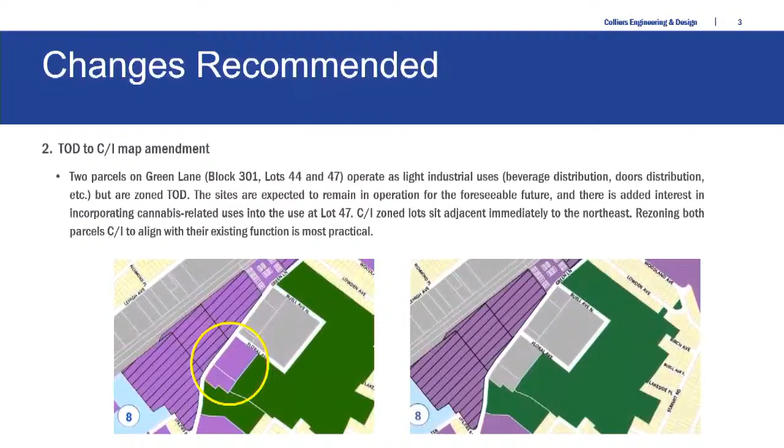In addition to changes recommended in the master plan reexamination, we had several administrative changes that I presented to you. I'll go over the gist of them now. These are miscellaneous amendments requested by the township, including regulation of massage and bodywork services, tattoo parlors, prohibiting methadone clinics, and parking of flatbed utility trailers.

Specifically, tattoo parlors, we defined them matching the definition that the state provides. Technically they are body art establishments, although colloquially we call them tattoo parlors. This would confine them, as a conditional use, to properties along Route 22.

Methadone clinics, again it's a state definition, and that is one use we are allowed to prohibit, and we've done so. Massage and bodywork is actually regulated elsewhere in the code through licensing and inspection regulations. However, we've cross-referenced that health and safety section of code within zoning so that they are consistent with each other and the two are understood to speak to one another.

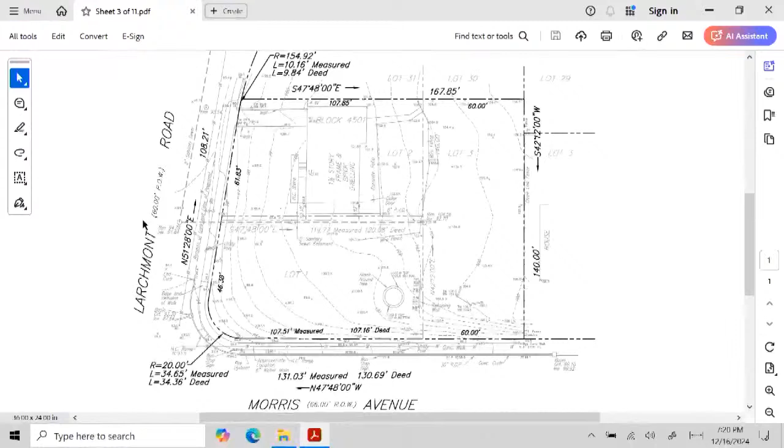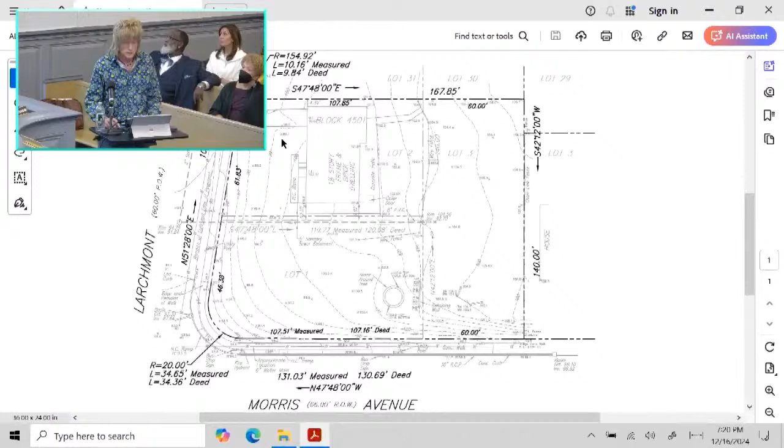The site is located in the NC Neighborhood Core Zone District. Uses surrounding the site are single-family detached properties to the north and to the east, offices and a church to the north and west. To the south and east is a bank and offices, and to the south and west is a funeral home and offices. So this is the site plan sheet 4.

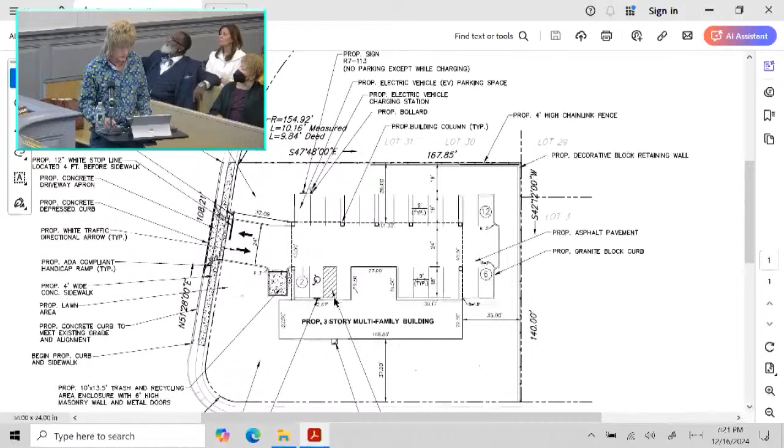So the applicant for the project is proposing to demolish the existing house and construct a 3-story multifamily dwelling and an asphalt paved parking lot to serve the development. There's a total of 11 apartment units proposed. The first floor will contain 3 one-bedroom units. The second floor will contain 4 two-bedroom units, and the third floor will contain 4 two-bedroom units.

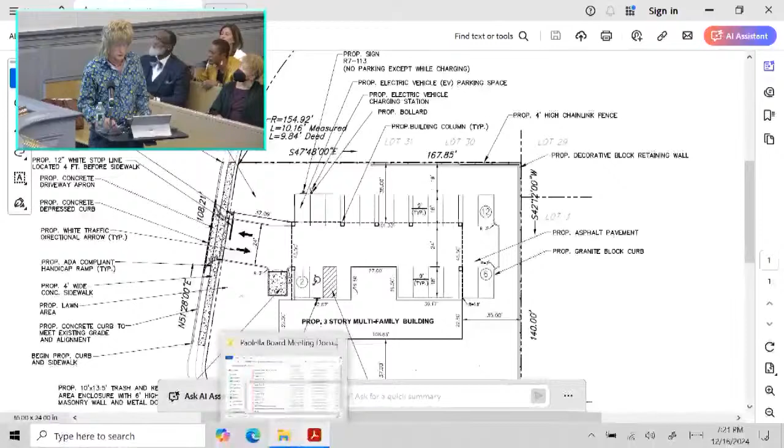The approximate dimensions of the building are 68 feet by 109 feet. The building will be set back 37 feet from Larchmont Road, 37 feet from Morris Avenue, 35 feet from the side property line, and the rear property line will be set back 35 feet as well.

There's 20 parking spaces proposed, including one handicap parking space and one electrical vehicle parking space. The dimensions of the stalls are 9 by 18 feet, and the handicap space will be 8 by 18 feet with an 8-foot wide aisle for van accessibility. The parking lot will be partially covered by the second floor of the building.

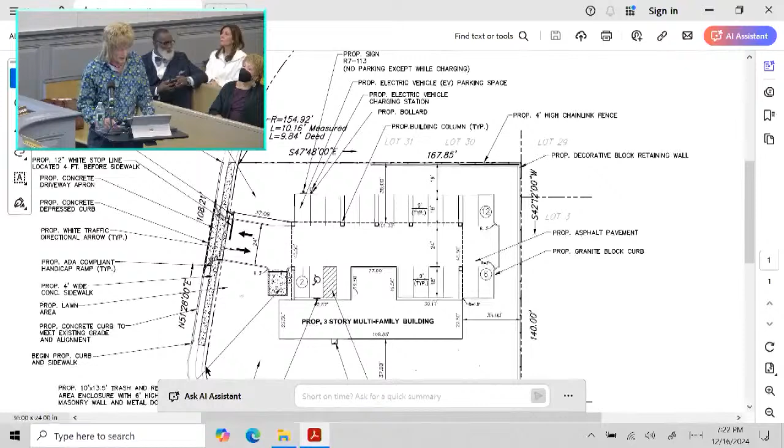Access to the site will be from Larchmont Road by way of a 24-foot wide access driveway. That'll be two-directional. There will be minimal truck traffic anticipated. The aisle widths should be sufficient, and the traffic impacts should be minimal at the driveway.

So we'll go to the grading and drainage plan, which is sheet 5.

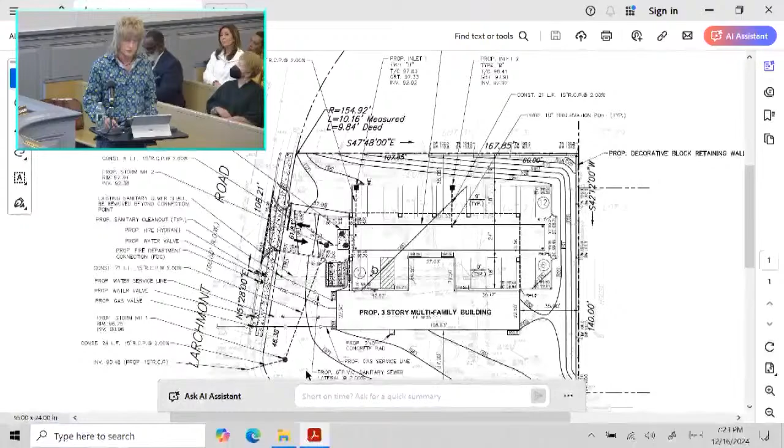Proposed drainage improvements for the project include construction of a subsurface detention facility located underneath the parking lot, and a storm sewer system to collect surface runoff from the roof and the parking lot. All that runoff will be directed to the detention facility. The proposed detention facility will have a storage capacity of 4,976 cubic feet. It'll consist of 15 feet by 114 feet by 3-foot deep Brentwood storm tank modules.

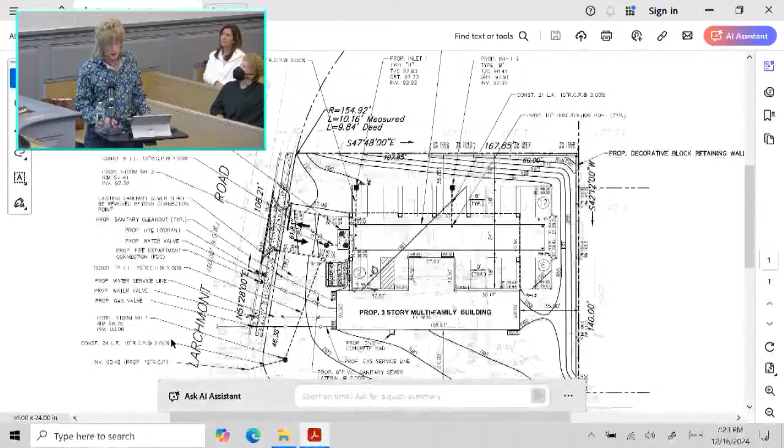The outflow structure will control the runoff from the site. The outflow pipe will be connected to an existing storm sewer on Larchmont Road. Since all the runoff will be directed to the detention facility, there will be no impact on downstream areas. As far as utilities go, proposed utilities include existing gas, water, electric, and sanitary sewer, which will be extended from Larchmont Road into the site.

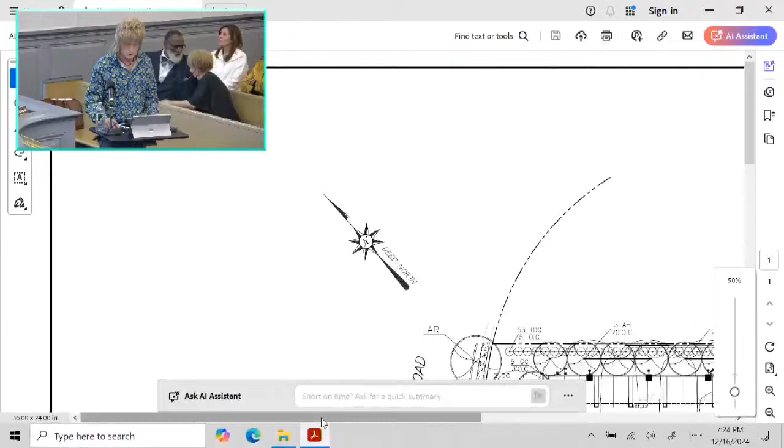As far as lighting and landscaping, we'll go to sheet 6. Lighting will consist of 10-foot high pole-mounted luminaires. There'll be LED lights located along the perimeter of the parking lot. There'll be down lights so they won't shine onto adjacent properties or the existing roadway system. Canopy lights will also be proposed under the garage.

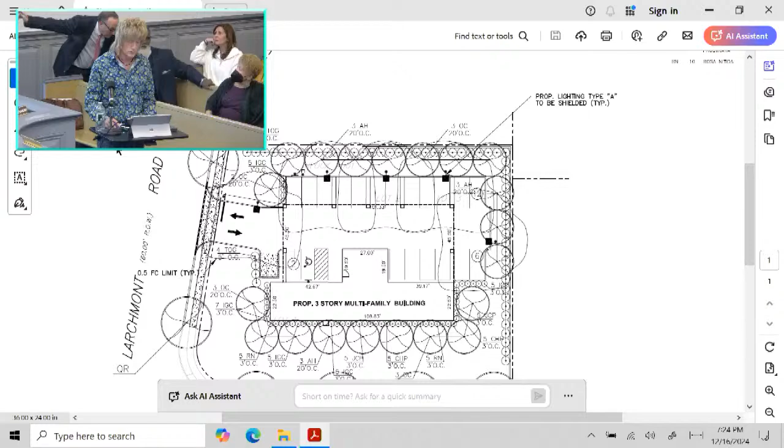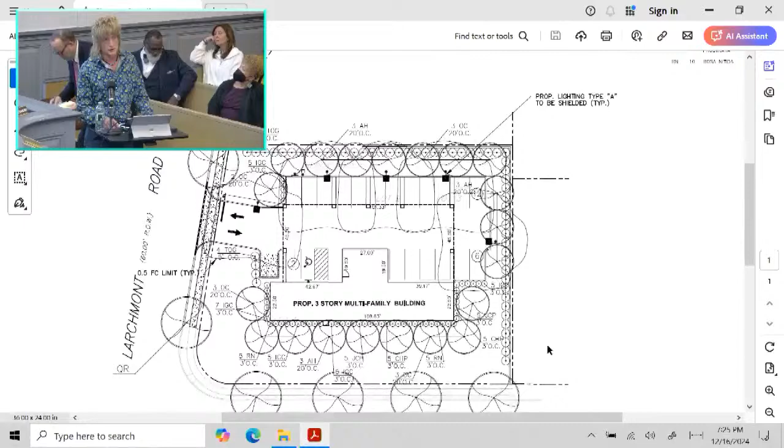As far as landscaping, proposed landscaping will consist of shade trees planted along Morris Avenue and Larchmont Road. Flowering type trees will be planted along the perimeter of the parking lot and the building. Foundation type plants will be planted along the perimeter of the building, and screening type trees will be planted along the trash enclosure and along the side and rear property lines. All other areas will be seeded and sodded.

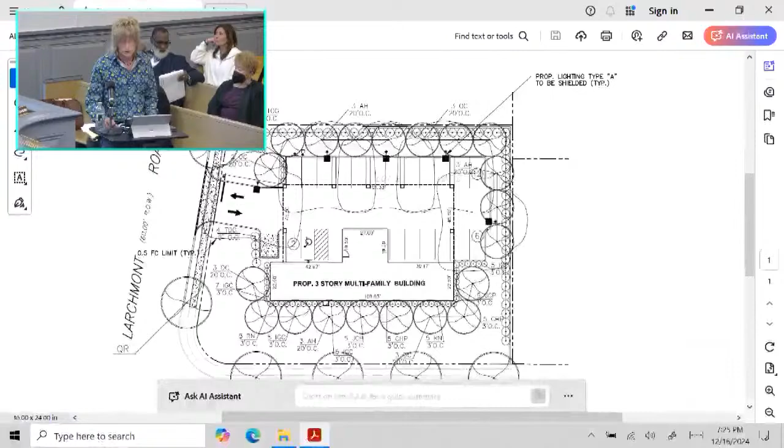As far as variances, there's one bulk C-type variance required. That's for a minimum lot width, required at 150 feet, where 140 feet is existing and proposed. This variance is pre-existing and attributed to the existing size of the property. In addition, the proposed multifamily residential use is a permitted use in the zone, and the variance required is minor in nature and is a pre-existing condition.

We have received comments from the Township Board Engineer in a letter dated August 30th, 2024, and also from the fire official in a letter that wasn't dated. The applicant plans to work with the board engineer and the fire official to address the comments. If the board would like me to go through the comments, I will.

Mr. Chairman, we have no problem complying with any of the terms and conditions, and certainly if you want, Mr. Ramo can go through each of the items in the Colliers letter.

Actually, please do. Okay. What's that? Mark, why don't you take us through... Okay, you've identified the one pre-existing variance. Why don't we begin with the Colliers letter, beginning on 2.1.

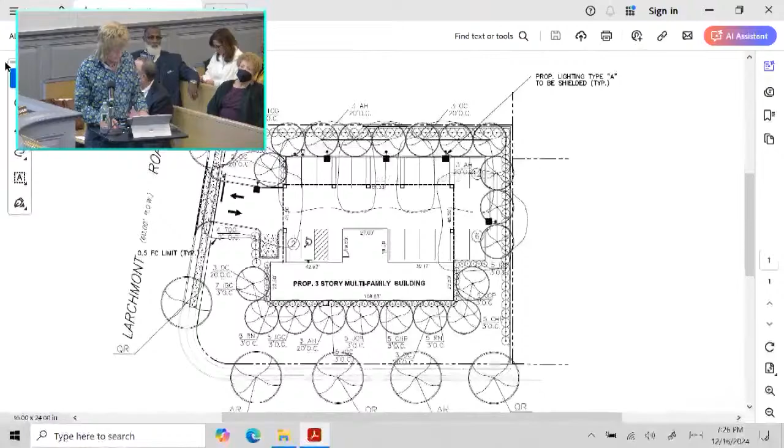Okay, so in the Colliers letter dated August 30th, 2024, item 2.1, off-site off-tract improvements: we're proposing curb, driveway aprons, landscaping, and utility connections to Larchmont Road. That's just a comment. Item 2.2, all trenching in the Larchmont Road right-of-way shall consist of flowable fill. We have no problem with that. We'll propose flowable fill.

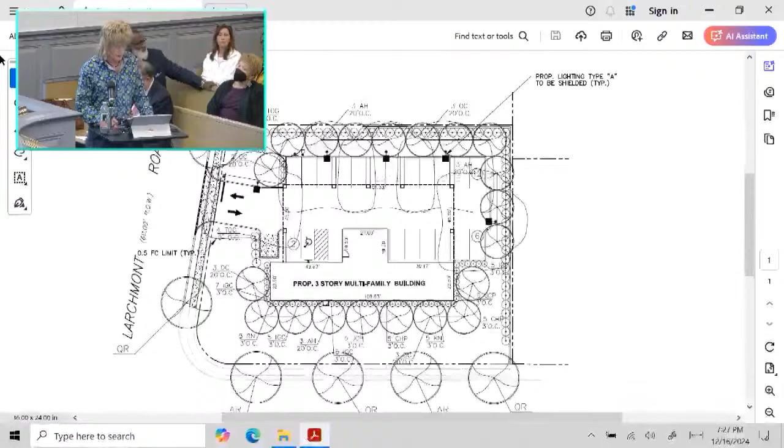Stormwater, item number 2.3: stormwater will be connected to the inlet on Larchmont Road. The inlet shall be examined and structurally repaired if necessary during connection. All repairs shall be made under the direction of the township engineer. The applicant agrees to that.

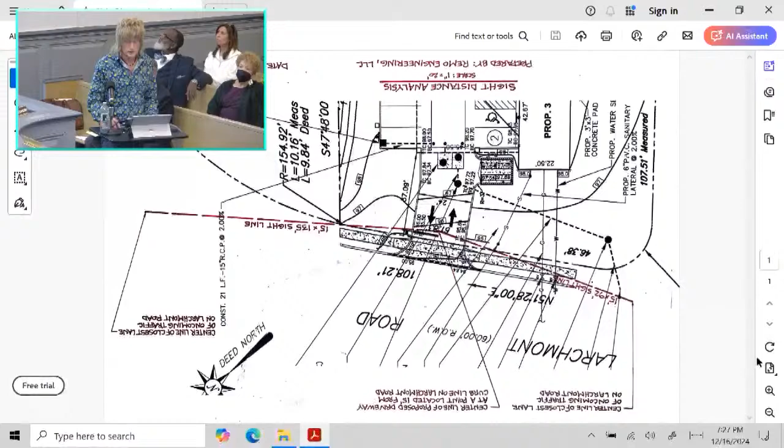Sight triangle should be shown on the egress driveway on Larchmont Road in accordance with AASHTO standards. I did prepare a sketch. We'll revise the plans to indicate that. No problem complying with that. Yeah, I do have a sketch here that actually shows the sight line. So this is the driveway.

So a car exiting the driveway looking right could basically see 135 feet to a vehicle coming towards the driveway from the right. And then towards Morris Avenue, you could basically see, I believe, 192 feet.

So I don't see a problem with the sight distance. Obviously, Larchmont Road, there's a horizontal curve that bends around, so that kind of limits your sight, basically.

As far as off-site improvements, item 3.1, the applicant shows basic on-site improvements.

That's just a comment. Item 3.2, all water flows, domestic and sprinkler, shall be calculated by the applicant and confirmed for availability by New Jersey American Water. We'll provide that.

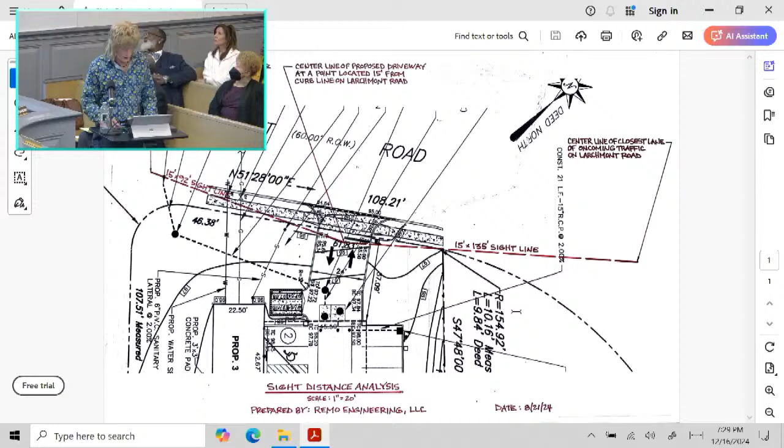Item number 4, grading and drainage. 4.1, grading information on the plan clearly shows stormwater flow directed to the northwest. Additional grades should be shown in the area of the ADA accessibility spaces to confirm compliance with ADA grades and codes. As-built construction shall be required to confirm proper construction. We'll provide some additional grades in the handicap areas.

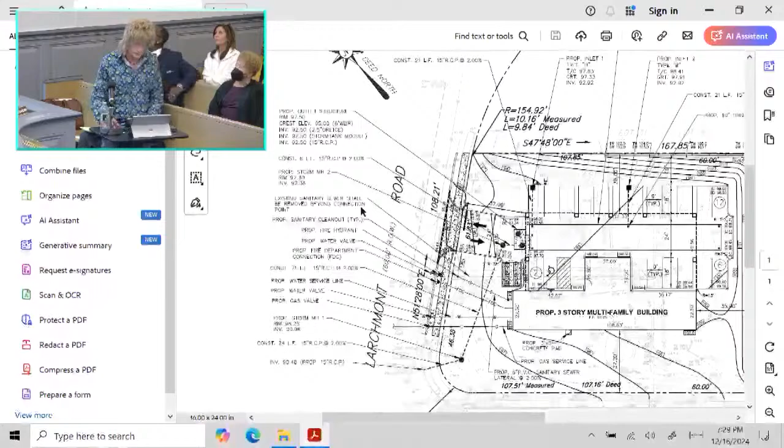Item 4.2, the applicant proposes increasing impervious coverage from 13.6 to 45.2, as indicated in the stormwater management report, therefore increasing the impervious coverage by 0.18 acres. Since the disturbance of 0.57 acres is less than 1 acre and the increase of impervious coverage is 0.18, the project's not considered a major development.

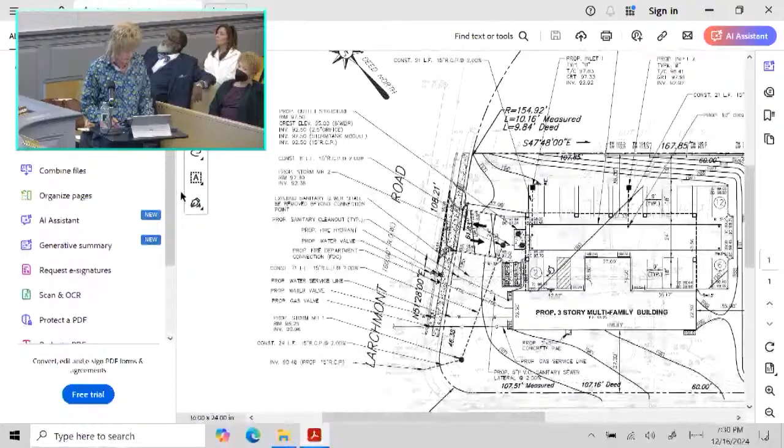Item 4.4, applicant proposes the installation of stormwater detention facilities located below the parking lot, connected to the flow control structure, and discharges into the inlet on Larchmont Road. Again, this is just a comment regarding the size of the system.

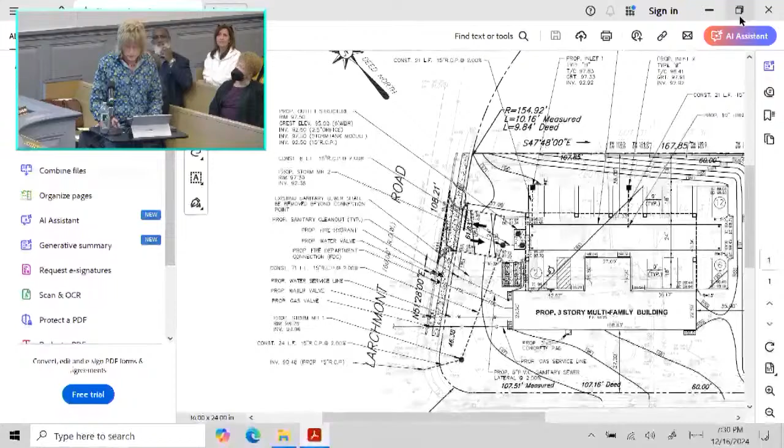Item 4.5, peak rates for the proposed detention facility for the 2, 10, 25, 50, and 100-year storm events are greater than the existing conditions during the storm events, which is unacceptable to the township ordinance. That's an incorrect statement. If we go to the drainage report...

Going down to the runoffs, you'll see that for the 2-year storm, we're decreasing the flow by 0.77 cubic feet per second. 10-year storm, we're reducing the flow by 1.08 cubic feet per second. 25-year storm, we're reducing it by 1.26 cubic feet per second. 50-year storm, we're reducing it by 1.35 cubic feet per second. And the 100-year storm, we're reducing it by 1.49 cubic feet per second. So we are reducing the flows.

Item 4.6, the applicant shall submit an operation and maintenance plan for the stormwater detention facility. We'll provide that, and as a matter of practice, that then gets recorded with the county, with the deed, so it's on record for maintenance of the stormwater system.

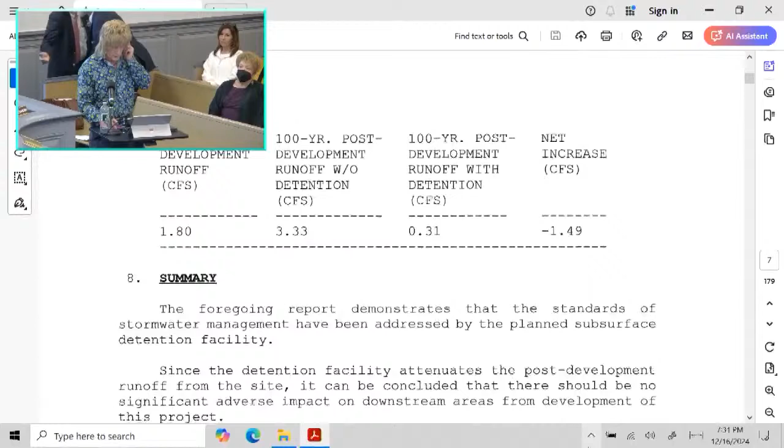Item 5.2, this is regarding the ADA requirements. Oh, 5.1 — I think you already said we comply with the parking. So 5.2, ADA requirements: for 12 parking spaces, basically, we need one spot, so we comply with that.

That's just a comment. Item 5.3 is regarding van accessibility. We comply with that. 5.4, in accordance with the ordinance, the handicap parking space must be equipped with EV equipment. We can provide that.

As far as sanitary sewer, item 6.1, the applicant provided sanitary sewer flow calculations, and we're proposing, for the proposed conditions, 2,250 gallons per day, so there's no treatment works approval required. That's just a comment from the board engineer.

Item 6.2, connections to the sewer line on Larchmont Road will require Township Department of Public Works approval. The applicant will comply with that.

Traffic and circulation: the applicant shall demonstrate that fire and emergency apparatus can access all areas of the site. Any proposed fire lane restrictions or parking from the Union Township emergency officials shall be implemented. We'll comply with that. I think the traffic engineer and the fire expert will go over the fire apparatus.

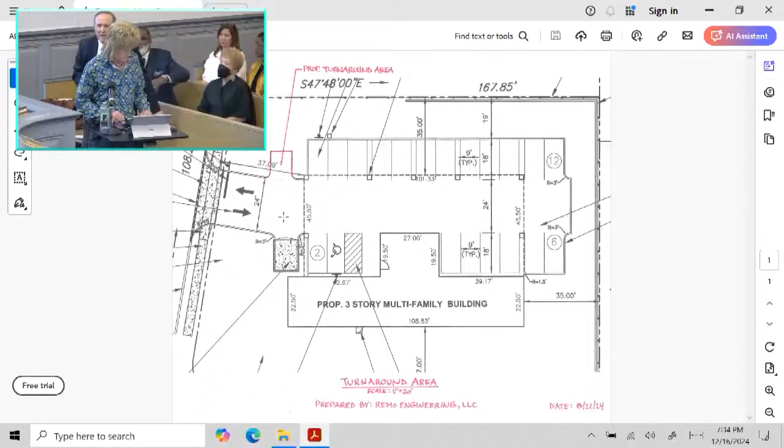Excuse me, Mr. Chair, can I point out the date of that exhibit? Mark? August 21st, 2024.

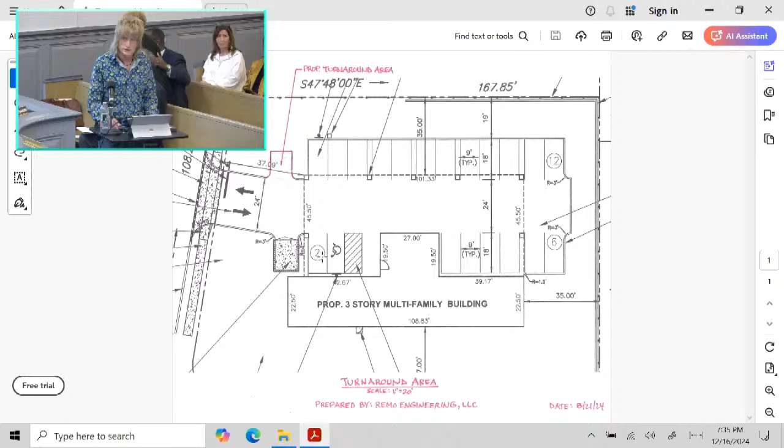Item 8, technical comments. 8.1: the three existing lots shall be merged if this application is approved, and a new lot number obtained from the tax assessor. Applicant agrees to that. We would prepare a lot consolidation deed with the description approved by your board engineer, then have it submitted and recorded.

Item 8.2: the site plan shall be revised to provide a note indicating the entire site will comply with ADA regulations. We'll provide that.

Item 8.3: there is no area inside for collection of garbage and recyclables. Residents will be expected to place garbage and recyclables in the outside trash and recycling storage area. The applicant shall provide a truck turning template to demonstrate the area is accessible by truck. We went over that in the last comment regarding the turnaround area.

Item 8.4: the zoning table shall be updated to include a column for the existing conditions. We'll provide that. Also, the building height should be revised to 34 feet 5 inches, and the minimum public right-of-way, not the frontage, should be listed in the zoning table as 60 feet, which it is. We'll make those revisions.

Item 8.5: the applicant shall testify on how many apartments will be affordable. We have to comply with whatever the affordable requirement is of the township.

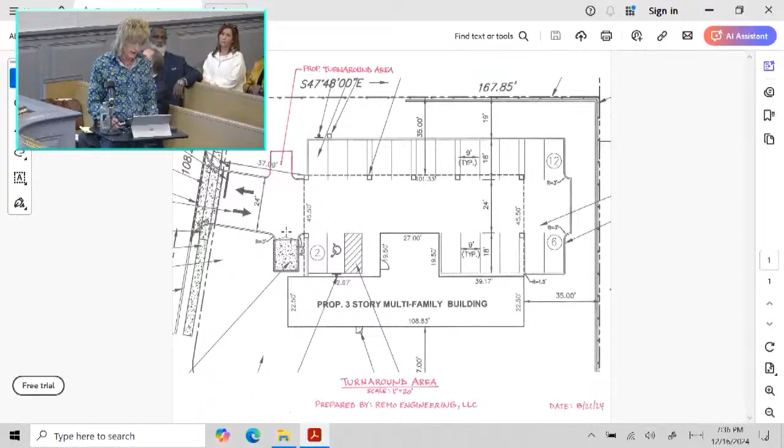Item 8.6: the applicant shall testify on the status of the monument sign at the entrance from Morris Avenue to Larchmont Road. The monument sign is existing, and it's going to remain as is.

Item 9: documents, permits, and approvals. If approved, the applicant shall provide an engineer's estimate of site improvements. We agree to do that. The applicant shall obtain a site improvement permit. We agree to that. A pre-construction meeting shall be held. We agree to that. Item 9.4: applicant must obtain a building permit after receiving site improvement permits from the township.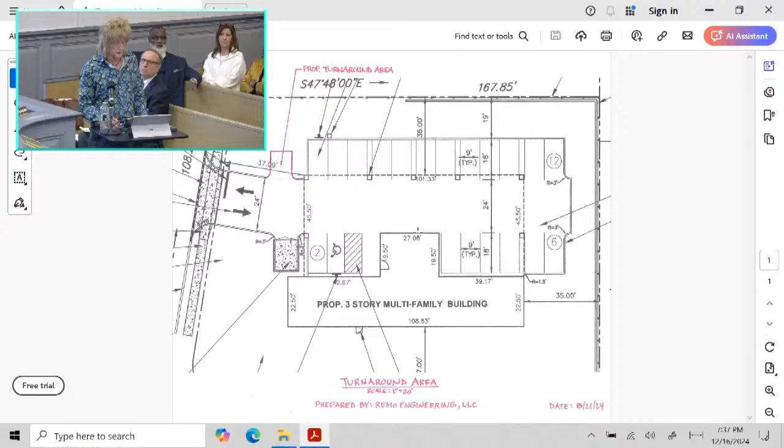Applicant agrees to that. 9.5: applicant shall obtain approvals from Somerset Union Soil Conservation District and the Union County Planning Board. Applicant agrees to that. We've actually prepared, as part of the set of plans, a soil erosion plan, which will be submitted to the Somerset Union Soil Conservation District for their review and approval.

I think that covers it; we can have the fire addressed separately. No further questions at this time of Mr. Remo. Questions from the board?

Mr. Remo, you indicate in your testimony and in the analysis letter from Colliers that impervious coverage is increasing from 13.6 to 45.2, yet you indicate in your exhibit that you're actually going to be reducing runoff. Can you explain how that is? If we're increasing impervious coverage, wouldn't we have more runoff? That's why we're providing a detention facility. The increase in runoff will be stored in the underground detention facility and then released in a controlled manner so that we actually decrease the runoff after development.

I tried to digest that chart with the calculations on it. I'm curious how you calculate those numbers representing reductions in runoff across different storm events. We calculate the existing runoff and the proposed runoff based on what's being developed. That difference, when you pave the site or add impervious coverage, increases runoff. We take that runoff and put it into an underground system, controlling it with an outflow structure with a small orifice and a weir to reduce the flows.

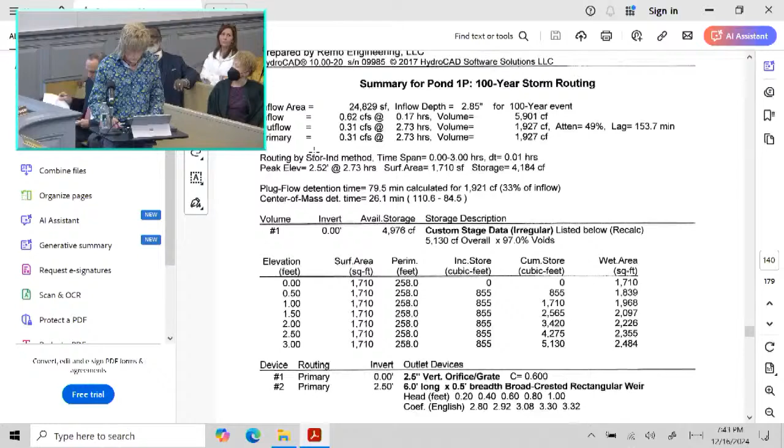Would it be helpful to answer? 2.73 hours for a 100-year storm. Okay.

Going back to the methodology that you used, and looking at the calculations, it's actually not a complex formula of computation that is used here. I think if you have a good solid algebra skill set, you're able to follow along. Does this methodology assume that the rate of rainfall is uniform throughout a period of time? Basically, it's constant.

Does it account for variations of rainfall during a period of time? Well, we use the NJDEP rainfall intensity curves. It's a type 3 curve that we use, and that's what's being modeled based on New Jersey. In this area, it's a type 3 storm.

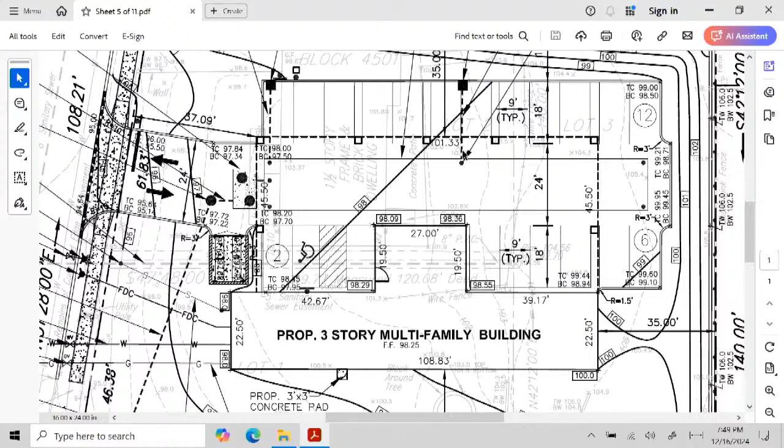So you see these pipes here connecting from the inlets to the detention facility. The roof drains will also connect. We don't actually show the roof drain, because it could be connected anywhere from the building into the system, since the system is pretty big. The architect will have the downspouts, and they will connect into the detention facility. So none of the impervious runoff will go uncontained into the detention facility.

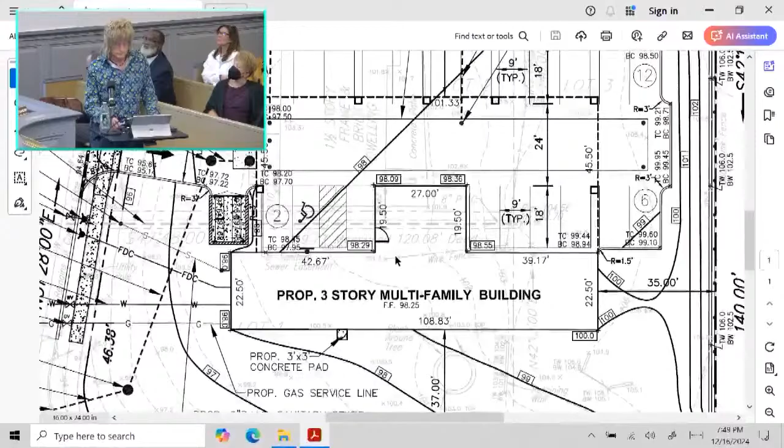So for the water that is stored in the sub-detention facility, I noticed in the letter, as you noted in your testimony, that it would exit off into Larchmont Road. Can you showcase how that looks?

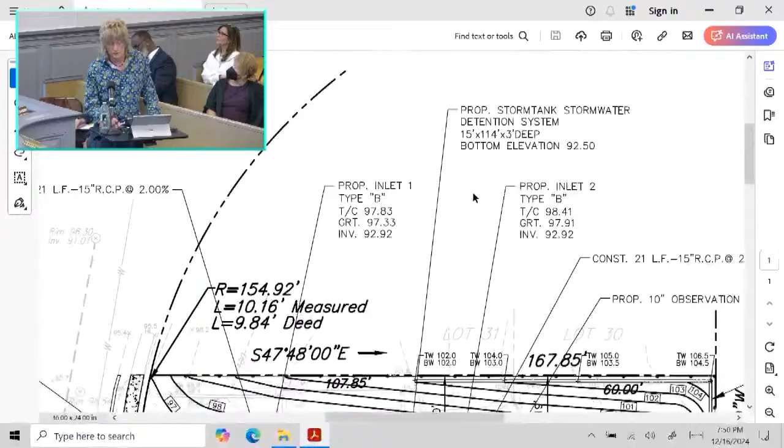Here's the detention facility, this rectangular area, 15 feet wide by 114 feet long by 3 feet deep. They basically look like milk crates. It's a 97% void ratio, so it's full volume - there's not much solid space in there.

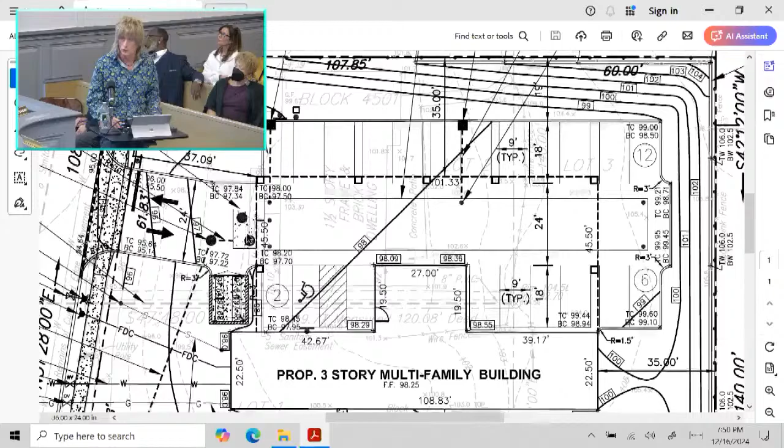So that'll flow out into an outlet structure, where you see these two manhole covers - that's your controlling structure, a weir, an orifice that controls the flow. Then it goes out of the outlet structure to a manhole, to another manhole.

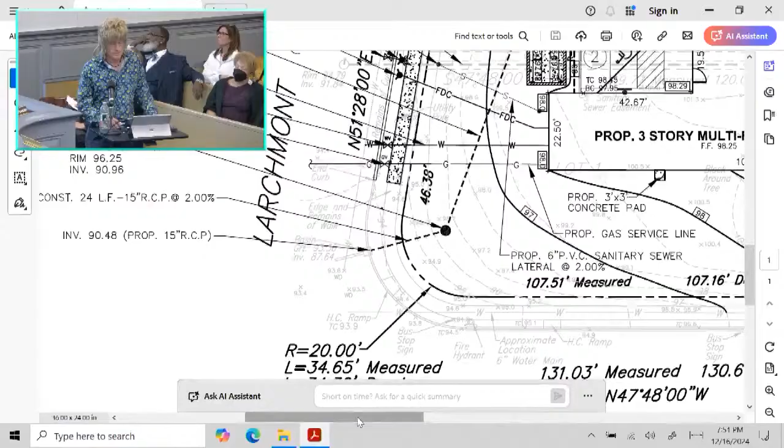And then drains and connects to the back of the inlet on Larchmont Road. If you can orient me, that's basically near the intersection between Larchmont and Morris? Yes, it's right here.

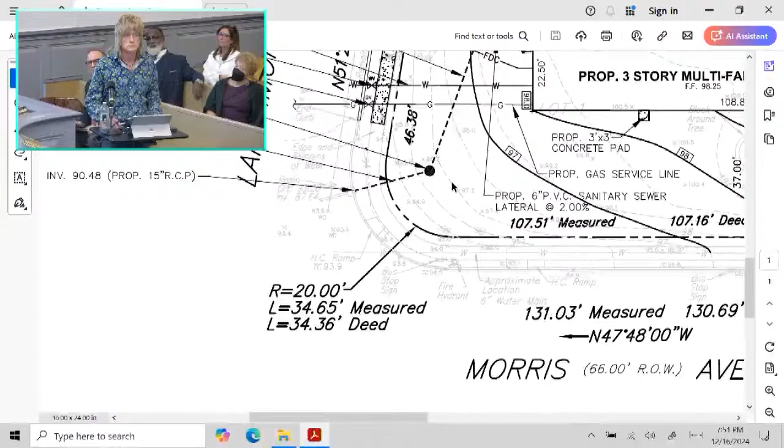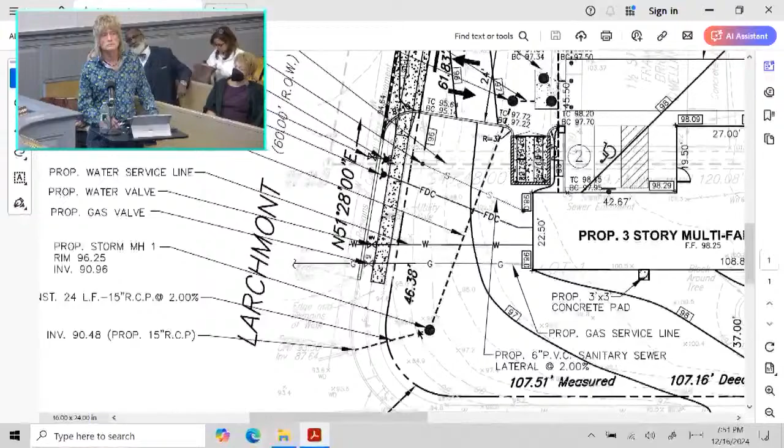My follow-up question would be, as you have the proper controls to have that water go into that inlet, do we account for the possibility - did we account for the capacity of the inlet itself at that intersection of Larchmont and Morris, to understand what's the capacity and the risk of it going over capacity, in which then it runs off? Well, we didn't do a capacity analysis of the existing storm sewer system on Larchmont Road.

We could do that. We would have to obtain some more information on the system, but we are actually reducing the flows of what's going there now. We could provide that analysis if it's needed.

Based on what you were saying about the grading of the area, any runoff would head toward the northwest, basically, right? Yeah, the existing runoff is generally running towards Larchmont Road, like it is proposed - we haven't changed the drainage pattern after development. So basically, what's going there now is the same, just less is going there now to that inlet. But we didn't analyze the existing system we're tying into.

And this is based on peak flows? This is based on peak flows, right? Well, this is based on the outflows from the detention facility.

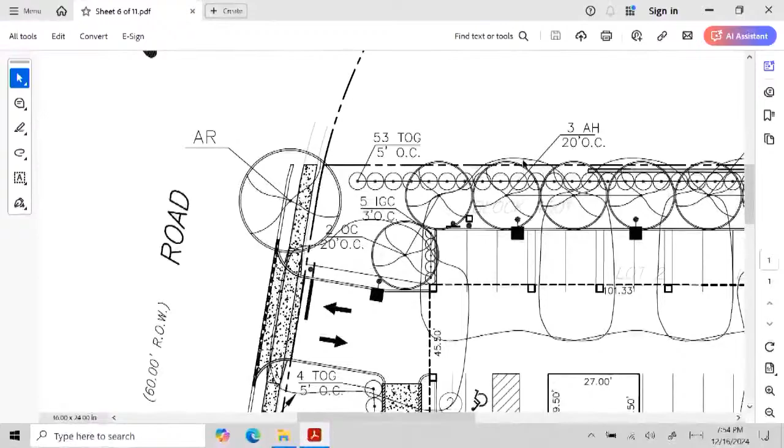And those lights are also going to be shielded, so technically there's going to be back plates in there. So they're actually going to be shielded where you're not even going to get that 0.5. So you're straight down? Yeah, pretty much. If you see there's a note on there, proposed lighting shall be shielded, even though the photometrics technically show it as if it wasn't actually shielded. Okay, thank you.

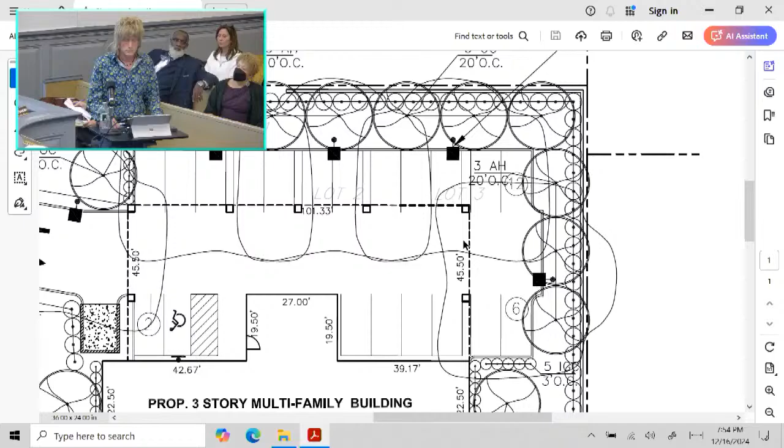Any other questions from board members? Thank you, Mr. Chairman. Just a quick question - your detention system relies upon infiltration, is that correct?

It doesn't rely on infiltration, but we are providing infiltration. Did you do soil pits out there? Did you take a look at the soils? Yes, we did. And are you indicating that you believe the soils are adequate for infiltration out there? Yeah, we have the soils report in the back of the drainage report.

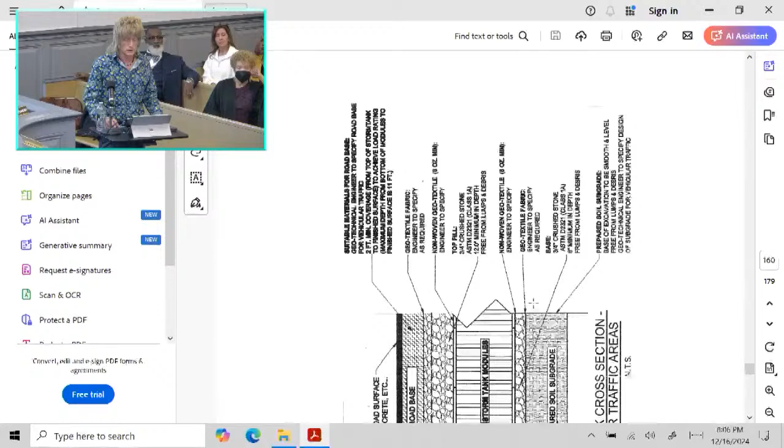You indicated there was a runoff coefficient you relied upon. What was the coefficient, and how did you determine which coefficient to rely on? Well, it's a weighted coefficient, based on—let me see if I can find that chart. Excuse me, board, I need to look here. I don't mean to turn my back, but I need to see the screen. So these are the runoff coefficients: asphalt pavement is .99—the higher the number, the more runoff. Roofs .99, concrete .99, brick .99, lawn .51.

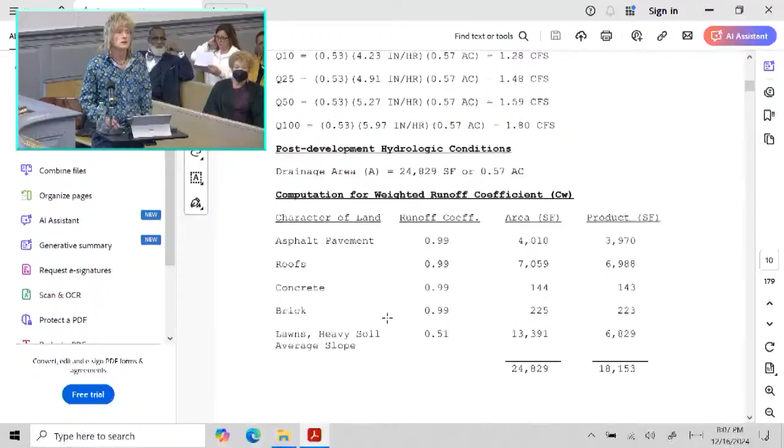What percentage of the site did you classify as lawn compared to the others? With the DEP regulations, don't they have classifications such as meadow and other kinds—isn't that what DEP uses? Well, this is the rational method, there are other methods you can use. We show lawn area, runoff coefficient .51, which is actually a little higher than what you'd normally use, so these numbers are actually a little on the high side.

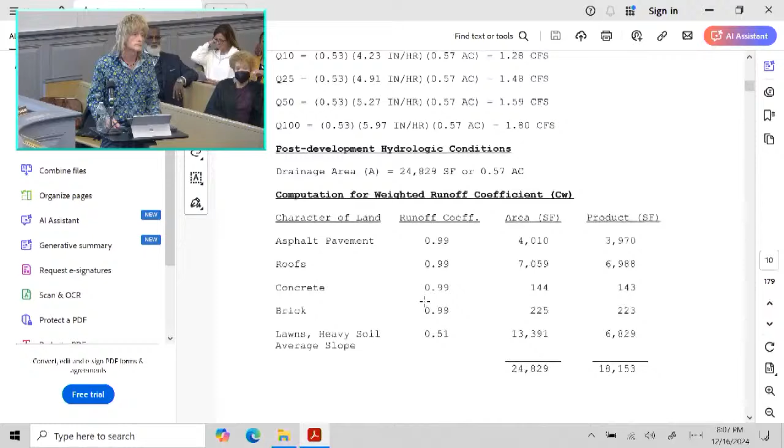But aren't these runoff coefficients DEP determinations? They are. DEP uses this—don't they have classifications such as meadow? I know it's one of them, and there are a few others like that. Is that the chart you took from? Because I don't—yeah, actually, we did. Let's see if it's in the back of the report here.

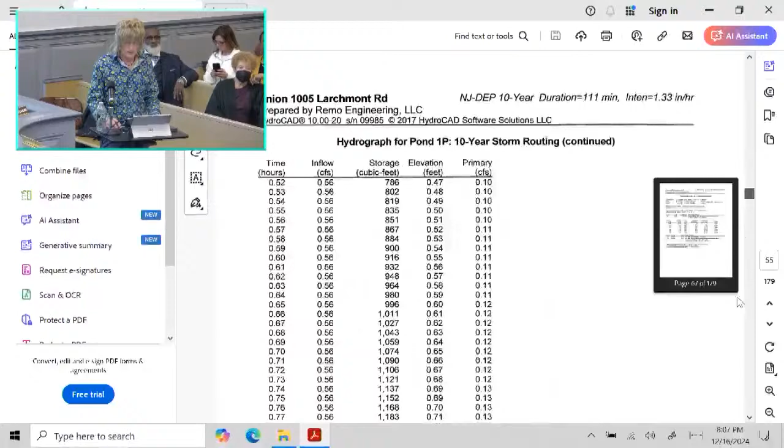This chart shows, and again, the numbers we used are actually higher than what I'd normally use on a project that's not a major development. When you're talking about meadow in good condition, you have runoff coefficients of .44 for hydrologic soil group C. We're using .51, so we're actually higher. But what was your hydrologic soil group? Your soils are pretty poor over there, aren't they?

It's a different method as far as the hydrologic soil group, so we didn't use CN numbers. But the runoff coefficients we use are .99. You can't get any higher than that.

What percentage of the property did you classify as lawn compared to brick and the other designations? Hold on, I have to go back. Okay, so for the proposed conditions, 13,391 square feet of lawn.

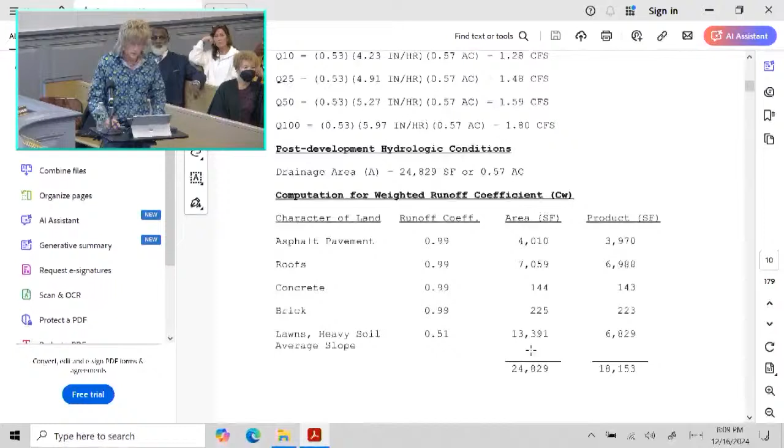And that was in the pre-development state, is that correct? So post-development. I see. And pre-development is 17,159 square feet of woodland and 4,298 square feet of lawn area. So obviously that's reduced because we're putting...

Can you go back to the pre-development, please? So you're saying that what's there right now is a house, right? There's a 1.5-story house there, correct? That's correct, yeah. So you've got roof area. How much of the rest is lawn, right? Isn't much of the rest of that property currently lawn? Yeah, it's predominantly woodlands and lawn.

But you have it designated as mostly woodlands with heavy soil, and then lawns, about a quarter of it being lawns. Is that really what it is right now? Is it really just a quarter lawn and almost 4 times that woodland? Is that what you're saying is there right now? Because that affects the pre-development numbers, which show what you really need to be post-development. Is that really what it is? Is it really 1/4 lawn and 4 times that woodland right now?

Yeah. And actually the runoff coefficients are pretty close, actually. Well, I know, but it's not going to really affect the calculation so much. I know, but yes, that's what it is. But a lot of times people finagle those numbers in order to show a lower burden post-development than pre-development. So you're trying to say there's more lawn than what we're showing? Well, that's what I'm wondering. It seems to me if there's more lawn, then that helps us. That means there's more pre-development runoff, because the runoff for lawn is actually higher than for woodland.

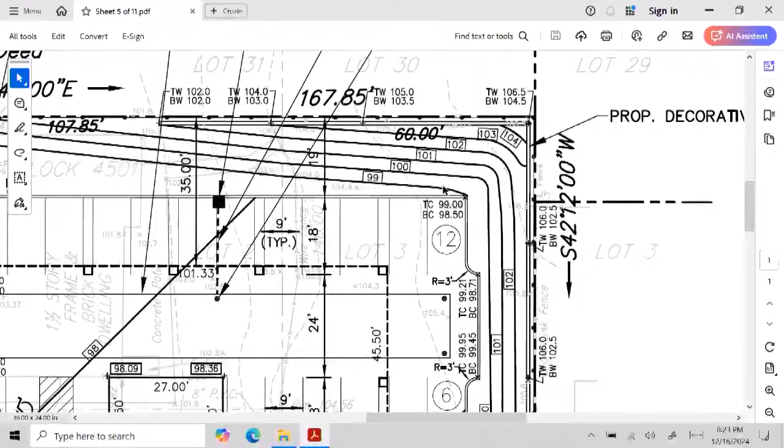And the elevation of that fence, what is that, as depicted by this drawing? The elevation of the fence, or the wall? The elevation of the wall, what is that? Well, the elevation of the wall, for instance in this corner here, which is the highest point, the top of wall is 106.5, bottom of wall 104.5, and the parking lot's at 99.

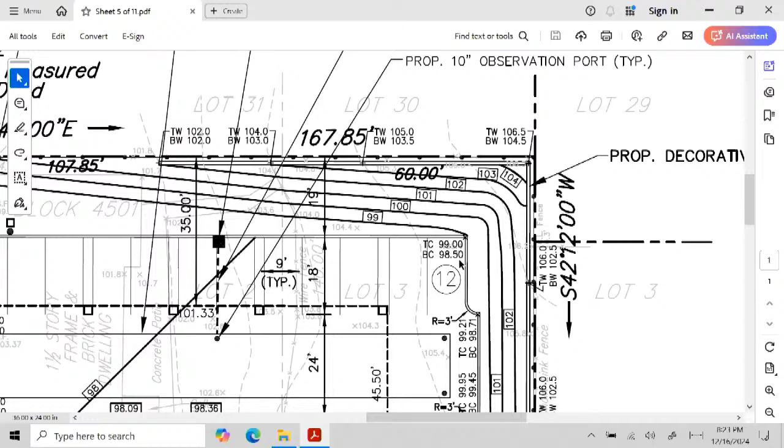So you're about 6.5 feet above the parking lot, the adjacent property. So the site is lower than the adjacent property. Is it uniformly lower than the adjacent property, or does that change as you move to the left? Well, it changes, but the whole site is lower than the adjacent property.

How much lower is it as you move to the left? Well, as we head towards Larchmont Road, you're actually pretty much the same over here. So you're not really lower over there, are you? Well, a little lower, but it's 100 and comes down to 98 here.

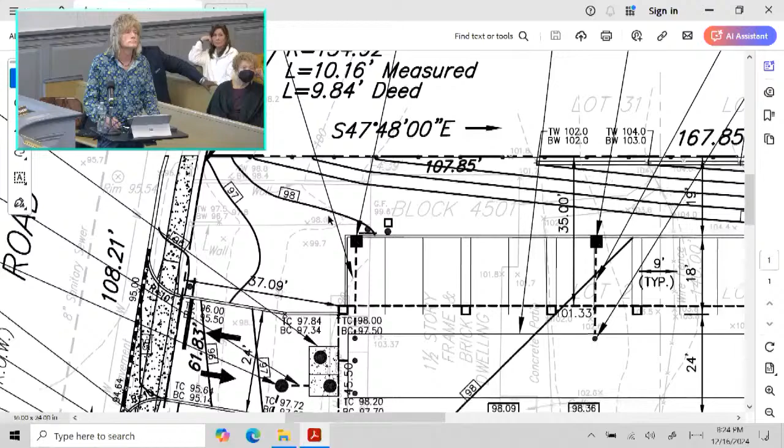So when you stated the height difference, that was predominantly reflective of conditions to the right as we look at this drawing, but not to the left. Isn't that correct? Well, it's much more cut as you go into the back of the lot than in the front. So I'm correct. Obviously the front has to meet the existing grade. So on Larchmont, we're basically at the same elevation.

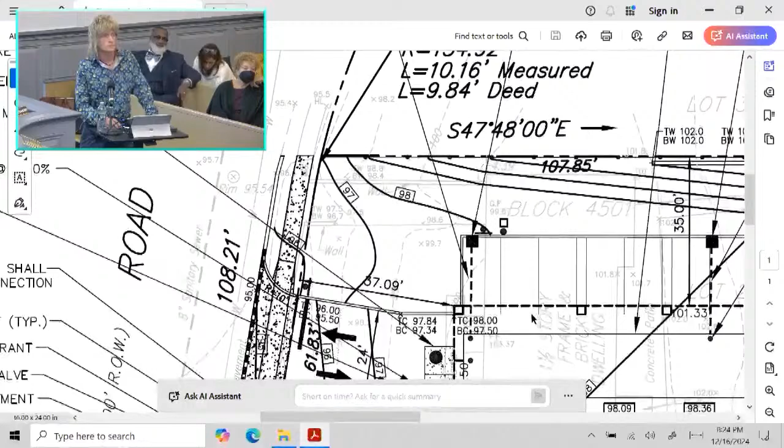But where the parking starts, we're actually lower than the adjacent properties. Right, some parts you're lower and some parts you're not. Well, where the parking lot is, it's totally under the adjacent property.

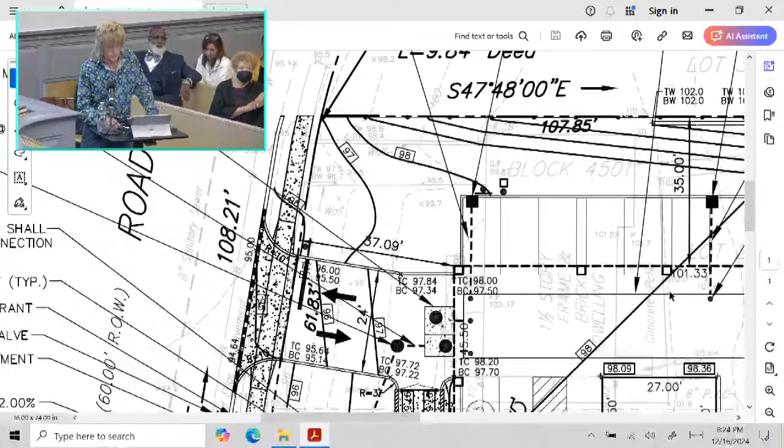How thick will the vegetation be? In other words, in terms of providing a sound barrier and a visual barrier, how thick is the vegetative buffer that you're proposing?

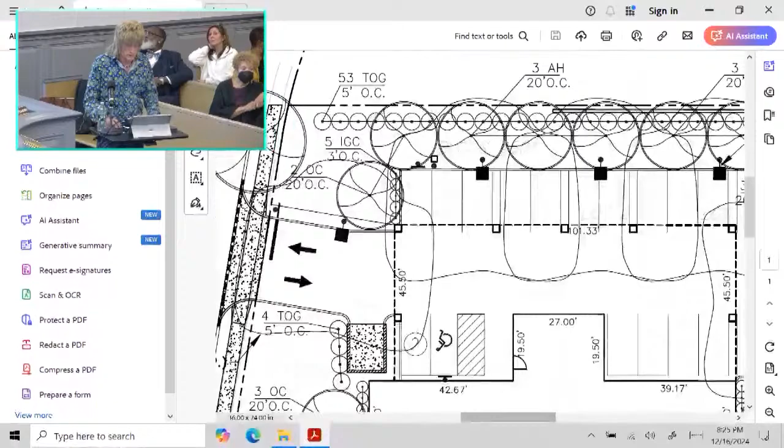So there's going to be screening-type evergreen trees planted 5 feet on center. They're pretty dense, planted along the property line here and all the way to almost Morris Avenue.

What size trees are you proposing to install? I believe they're going to be 6 feet high. Let me see if I can... 6 to 7 feet high. You're installing 6 feet high trees. Yeah, to start out with. And obviously they're going to grow.

How many years will it take for them to grow where there is a complete visual and sound buffer? Well, we anticipate 6 to 7 feet gives you a sound buffer. That's why we propose 6 to 7 feet.

You're telling me that 6 foot trees are actually expansive and developed enough to provide a sound buffer? Is that what you're saying? Are there any studies that say that, or is that just based on your experience? Based on my experience. Because those seem like very small trees. No, 6 to 7 feet is pretty high for an initial planting.

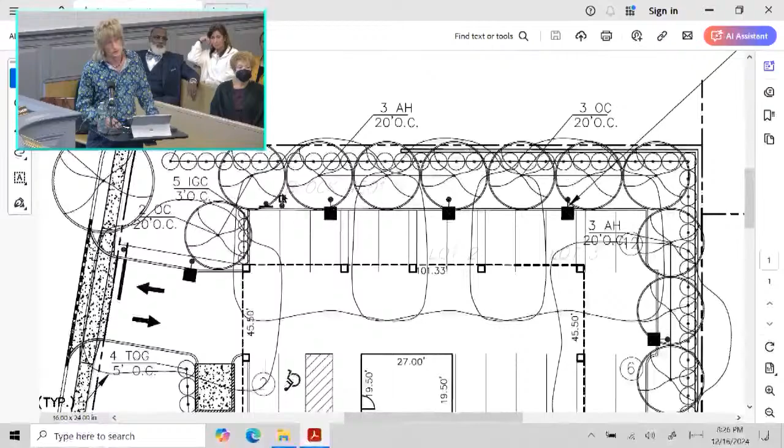Let me see if I have any other questions. And plus, they're going to be planted uphill, too, so you're also a couple feet higher than the parking lot.

Thank you. Can you go to, I don't know where it is now, because some of what I'm seeing here is a little different than what I initially saw. Do you have that architectural drawing that shows the height? I didn't see you show it today, but I'm not the architect. I know you're not the architect, but... Yeah, I don't have the drawing. The architect will have that.

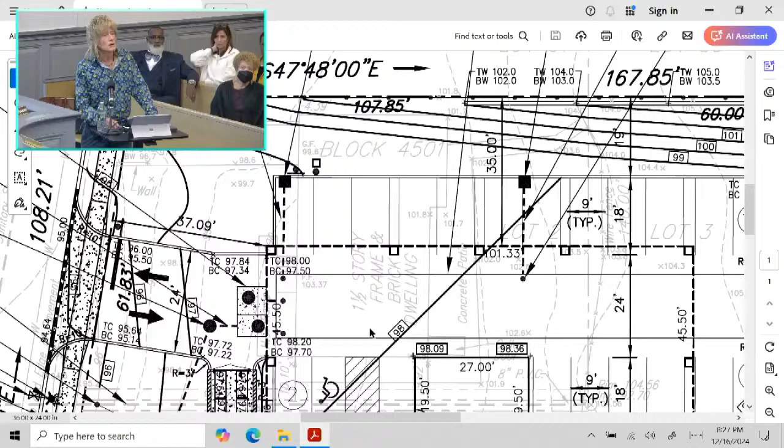Well, let me ask you a question. You have got the architect coming? Yeah. Okay, and will he show, I have a question about the height issue. So you're not prepared to testify about the height? It's the architect that'll address the height? Well, in general, I could tell you the height of the building is 34 feet, 5 inches, but the architect can go into more detail with that.

Under the local code, what is the maximum height allowed in that zone? Isn't it 35 feet?

Or 34 feet, 5 inches is what the architect is proposing. That's what I thought, 35 feet is required. 34 feet, 5 inches is the proposal. 35 feet's the maximum allowed in the zone. Is the parapet included in that measurement?

I don't think so, actually. The architect will answer that question. I don't believe so. I don't believe so either, and that was my question. It's normally not, but the architect will testify to that. Well, I noticed it was an omitted figure. When I looked at the architectural number, I saw the different figures, and there was a missing figure for the parapet, and that's why I was asking.

At this time, I don't have any other questions, and I thank everybody for your courtesy. Thank you. You're welcome. Thank you. Are there any other questions from the public?

No, I understand that, Mr. Lieberman, you're speaking on behalf of the association. I am. So no association members are going up to ask questions on their own accord. However, if you're not a member of the association, then that's my understanding. Yeah, thank you, okay. I'm going to sit down. It's going to take me an hour to get there, but I'm going to sit down.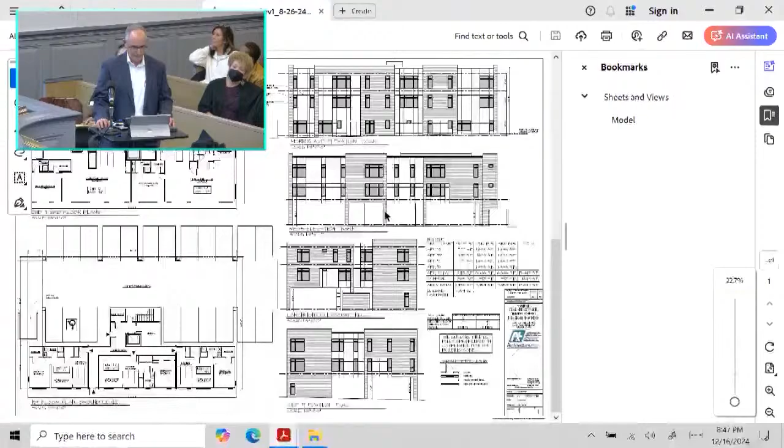Okay, let's see how this works. Okay, cool. This plan is dated, it's revised 8/26/24. We raised the building and added a sprinkler note, so I'm not too sure what you guys are looking at, but I believe that's the drawing that was submitted.

We're proposing a 3-story multifamily building, which you already know, with 11 residential units. The building is located within the buildable envelope. It complies with all the setbacks and building height, building coverage, and density requirements of the NC zone. The building is about 109 feet wide and 68 feet deep, and there will be some parking underneath the building. The 11 units will be comprised of 3 one-bedrooms and 8 two-bedrooms. The one-bedroom units are about 660 square feet, and the 2 bedrooms are all about 1,600 square feet.

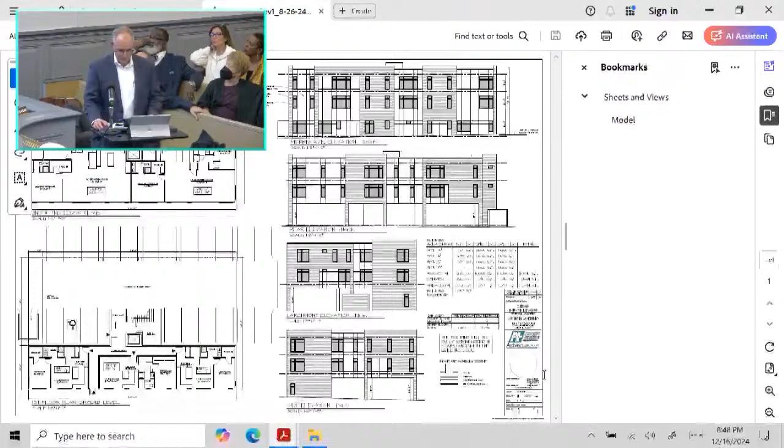At the ground level, let's see if we can do this. The ground level, there's access from the parking lot into a lobby, and there are 3 apartments across the front of the building facing Morris Avenue. Each of those apartments has a single bedroom, a bathroom, a living area, some walk-in closets, and some storage. The building is serviced by an elevator, there are some utility areas, and there's a fire stair and a mailroom on the ground floor.

The main entrance is under the building, off the parking area. There is an emergency exit that goes out the front of the building. It's not meant to be a main entrance, it's just for emergencies. We have to have 2 exits, and that will comply, but there are no walkways to it, it's just for exiting.

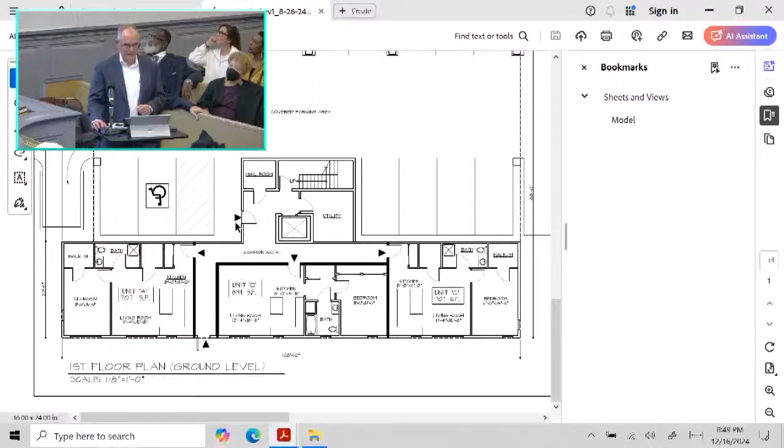Going upstairs, the second and third floors are basically identical. Let's see if we can do this. It's comprised of 4 units on each floor, basically 1 in each corner. Each of these 2-bedroom units has 2 bedrooms, 2 bathrooms, a kitchen and living area, and again storage and utility area. The elevator goes to all 3 floors, and the fire stair also goes.

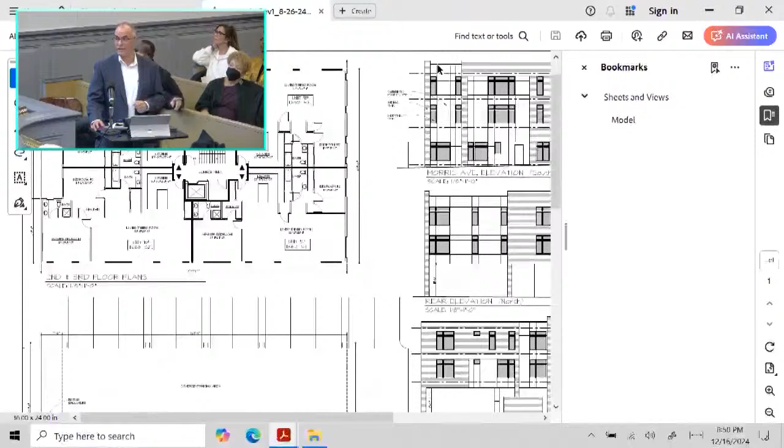There's some talk later, we are planning for the stairs to get to the roof, so the fire stair will provide access to the roof. And the building does comply with the building height, it's under 35 feet to the top of the roof. We are allowed 3-foot parapets per the township ordinance, and we're also allowed to have a stair bulkhead as long as it's under 10% per your ordinance. That gets us onto the roof, or gets emergency people onto the roof.

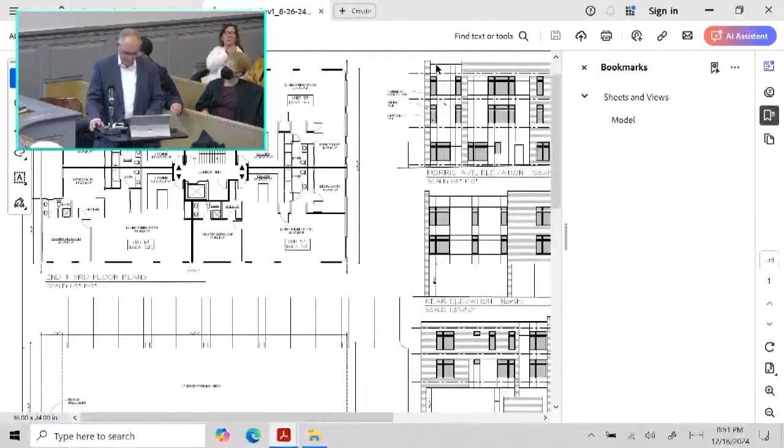The building and the covered parking area will be fully sprinklered per the building code. The exterior is a mix of wood siding and smooth synthetic panels with window punctures and a playful massing of the 2 different finishes. Like I said before, it's a flat roof with parapets. We're going to have small residential style mechanical units for each unit on the roof. They'll be properly screened and won't be visible from the road. We're providing access to the roof through the stairwell.

And like I stated, the building complies with all the setbacks, building height, building coverage, number of units, and density requirements of the NC zone. And I believe you also have a rendering. Yes. Let's see if I can find that.

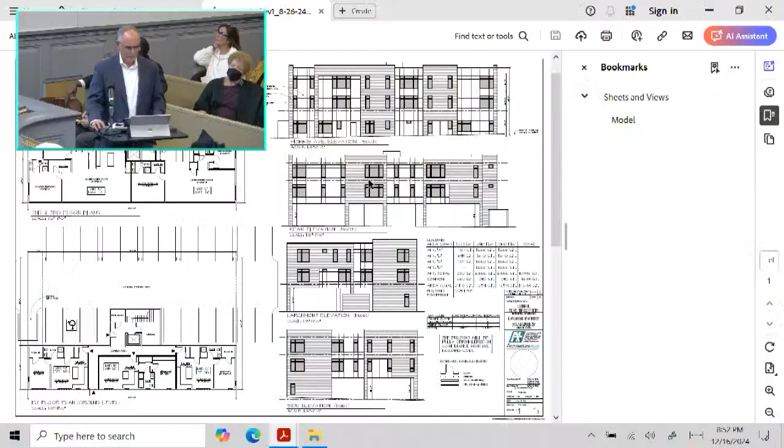So this is from the Larchmont, really the corner. This main face is facing Larchmont. You can see the driveway coming in off the left.

So this is a new exhibit. We ask that be marked as A2. Mr. Chair, can I get the date of this exhibit, please?

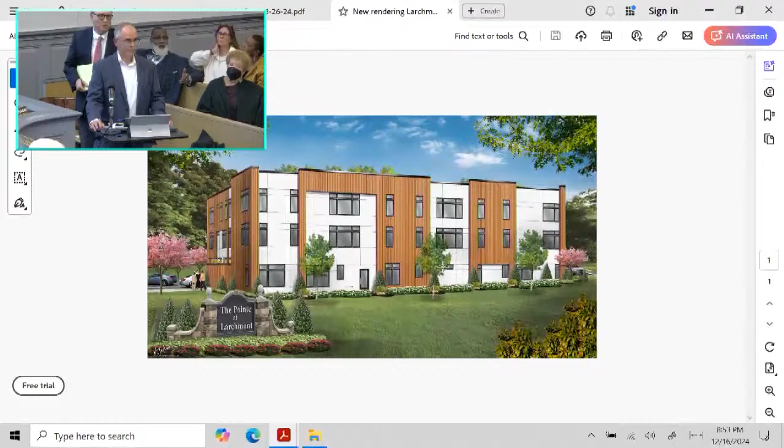Mr. Hale, Mr. Marion, if you want to provide the date for that? I didn't prepare this, so I would just put today's date. We can mark it as today's date. My only problem is it has to be 10 days before the hearing. Not exhibits, you know that. Exhibits do not have to be presented 10 days ahead.

Illustrative exhibits can be submitted on the night of a hearing. This is evidence that you're asking the board to evaluate. This is just from the architect, so it doesn't impact the variances or anything associated with the application. I object to this. It should have been 10 days before, in my opinion. It's evidence, and you're asking the board to rely on it and to evaluate it in its decision. Objection noted, Mr. Lieberman, we'll allow it just because it has been a precedent that we have allowed this in the past. But again, you will have the ability to ask your questions and scrutinize the application and the architect appropriately.

And this is a view from the Larchmont side. It shows the way the cars can access underneath the building. And from review, I don't think there were any issues raised in the Collier's review related to architecture.

So I have no further questions of Mr. Marion at this time. Questions from the board? Mr. Kine? Yes, thank you. I've forgotten your name, I'm sorry. It's Mark Marion. The windows, as in the illustration, appear to be casement windows, is that correct?

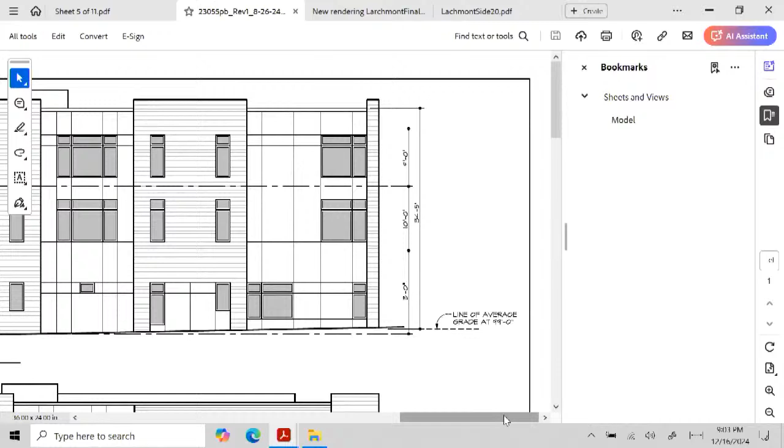To answer your question, the line of the average grade of 99, I believe that was the average grade provided by Mark Reno. When I asked him, he said you were the person I had to talk to about it. Well, you were talking about the parapet, and that's why I'm here. There you go. Thank you very much.

Just for formality's sake, are there any other questions from the public that are not members of the Larchmont Association? Okay, hearing none, I think we could progress to the next witness. Yes, thank you. Thanks, Mark.

I'd now like to call upon Jerry Naylis. I didn't mention him before. I wasn't sure if we needed to address the fire, but I guess they did want that addressed, so.

Mr. Naylis, would you just state your name and spell your last name for the record, please? Gerard Naylis, N-A-Y-L-I-S. And Mr. Naylis, do you swear the testimony you're about to give is the truth, the whole truth, and nothing but the truth? Yes, I do. Thank you, sir. All right.

Mr. Naylis, if you could please give the board and the public the benefit of your work, educational experience, and area of expertise that you plan to testify on this evening. Certainly. I have an associate's degree in applied science from Bergen Community College. I have a bachelor of science degree from Jersey City State College, also in fire science. I have a master's in administrative science from Fairleigh Dickinson University. Additionally, I have an associate in risk management designation from the Insurance Institute of America, and I took coursework at Seton Hall University to complete that designation. Additionally, I've taken graduate courses at the New Jersey Institute of Technology.

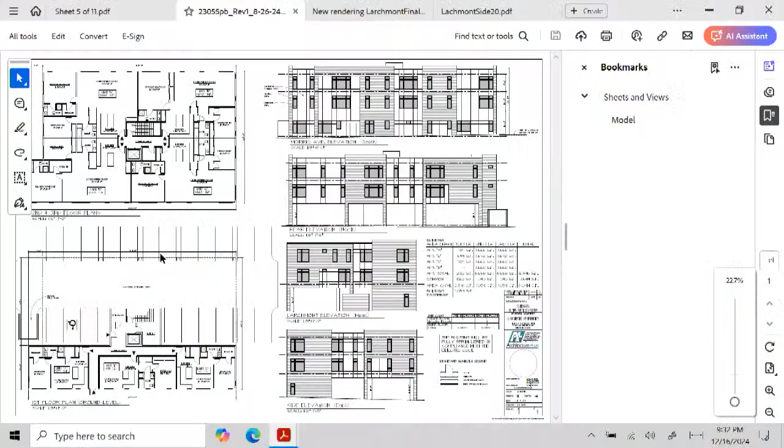So this is the core of the building, which has the elevator, utility room, and a fire stair. You can see there's a door there. Within the fire stair is where the standpipe would be located, and that's where they could ascend to the floor in question, hook up their hoses, open this door to the stair, and get into the common area, then enter whichever unit they need to enter with their hose.

Is there a standpipe on each floor? I believe so, yeah.

I have a question for Mr. Naylis. Mr. Naylis, how would you anticipate a resident vacating the building if their apartment was on fire? Come a little closer again. How would you expect the resident to vacate the building if their apartment was on fire? My recommendation... here, again, back to the mic. You can go to this one if you want.

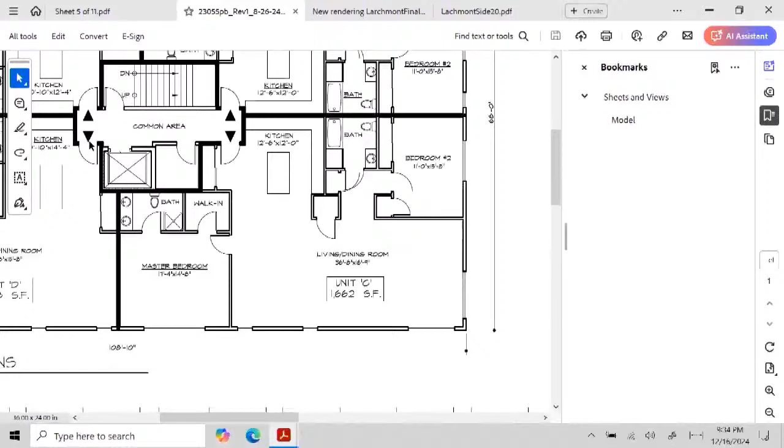Keep in mind that in addition to the sprinklers, there will also be early warning notification devices—a smoke alarm or smoke detector, depending on whether it's a single station or a device attached to a system. There will also be carbon monoxide alarms in the dwelling. So the resident will have advance warning even before the sprinkler activates that there's a fire, and they can safely self-evacuate from the apartment.

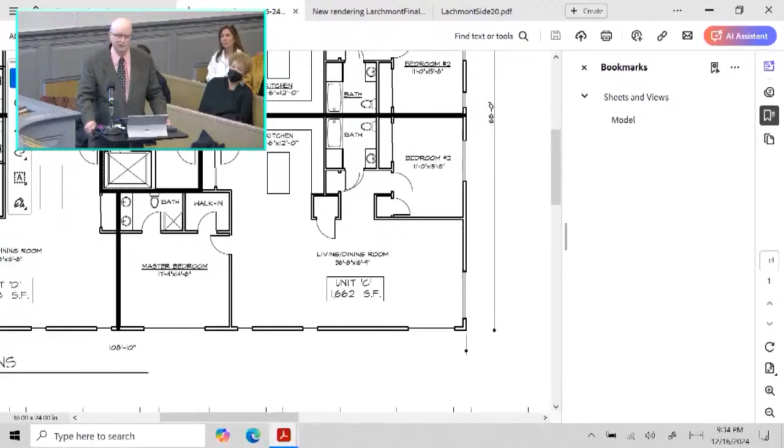You would not expect them to have to use the egress window then? You would not expect them to have to use the window to get out? No, I would never use a window to try and make an escape. The design of the code, which has evolved over many years, is such that these advance warnings are designed so people can make their way out of their apartment, into a protected hallway, into a stair tower providing a 2-hour level of protection, so they can get down and out of the building.

Any other questions from the board? Okay. Hearing none, questions from the public?

Mr. Lieberman? Thank you. Mr. Lieberman? Good evening, sir. Good evening. Interesting presentation. Thank you, I will just apologize—if you could speak a little loud, I have some difficulty hearing. No one has ever accused me of being too low before in my life, so I'm very excited about that. I will raise my voice to make sure you could hear me, okay? Thank you very much. You're very welcome.

So there's only one stairwell. Doesn't the code require two means of ingress and egress, not just one? Well, I believe there is a regular stair tower and an emergency stair tower as well that would provide the second means of egress, but I will defer to the architect on that issue. Particularly for a building like this—4 units per floor, 3 stories maximum—1 stair is required by the building code. Okay, thank you.